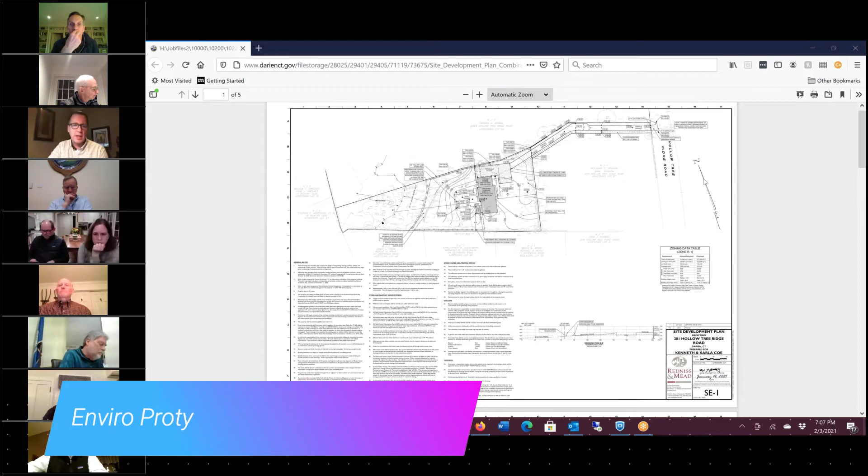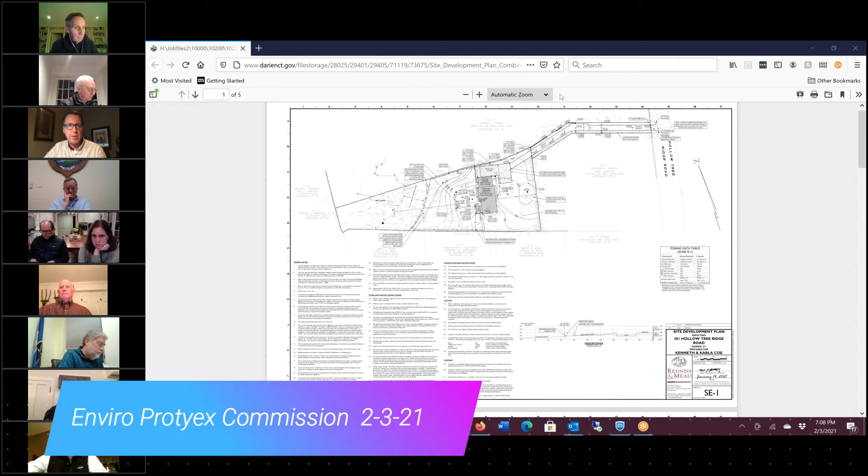The amount of disturbance within the 50-foot upland review area is very limited. It's just a single trench with two twin 6-inch pipes discharging to the edge of the wetland, and we brought it to where we have there really just to avoid having to pump any footing drain discharge. It gets everything nicely and cleanly by gravity down to the wetland area. It's about a slightly more than 50-foot run with a limited width trench.

We are demarcating the upland review area both with boulders as well as conveniently with a pool fence. So it will really cordon off the wetland area and prevent intrusion once it is developed. The house is set east enough so that there's plenty of room between the new house and the upland review area, so as not to need any temporary disturbance in the regulated area.

We have spoken with staff. They've had a couple of small comments. There's some accumulated landscape debris within the wetland area, within the regulated area, that has been accumulated over time by prior owners, which obviously as part of this we're happy to have removed. And there was a question about some of the stabilization. We do have a planting plan on record with the application prepared by Environmental Land Solutions that does spell out, and I think there was an email earlier, Rich, from Craig, just pointing out that particular.

Yes, I found it was a note about the seed mix, and I had missed it, so I found that. Okay, figured that out.

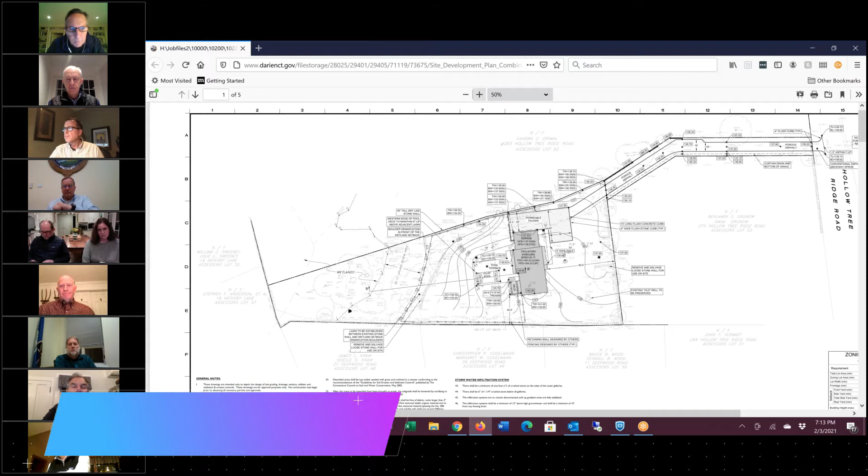It took me a while, like you described yourself, Eric, where it was a little hard to find. It took me a while. I was out there today. I did not walk all the way back to the back of the property, but I do see the wooden stakes right adjacent to the home at 283 Hollow Tree Ridge Road. So it's clear to me as I look at it where the proposed site is. I agree with Bill that it's quite a nice, very private little spot tucked in here in the woods of Darien. I think it's great, but I did have a couple of simple questions.

One more for correcting proper submissions by the consultants. But the first question, which maybe has a little more content to it: there's a letter in your package from ECM Associates addressed to Mrs. Drimmel at 283 Hollow Tree Ridge Road, dated back in July of '17. Could you give us a little background as to the 3.5-year difference in timing on that letter and in tonight's conversation?

It's going to take me a moment to just bring that up. I was originally thinking, was this a subdivision of the Drimmel property? But I think it's pretty clear that's not the case, but I could use your help. All right.

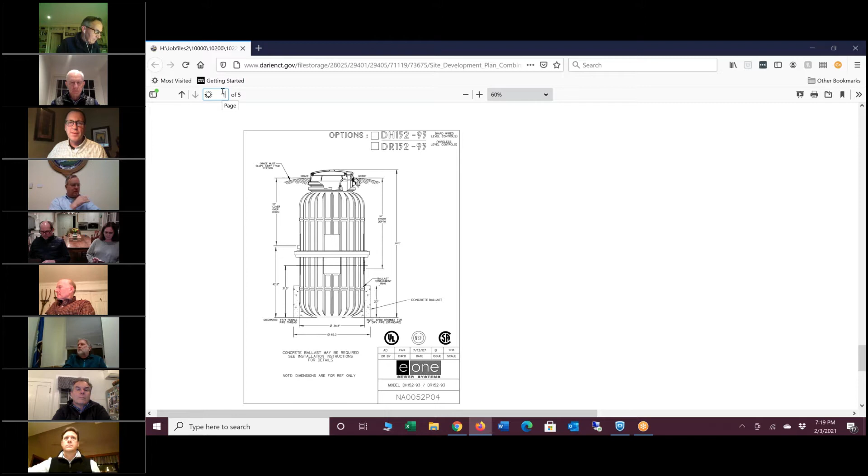We'll be sure to do so. Thank you. Okay, hey Brian, if Jim's figured it out, I'm not surprised, because he's brighter than I am. But from what I get, there was a house there -- it's a replacement. It was taken down in 2015.

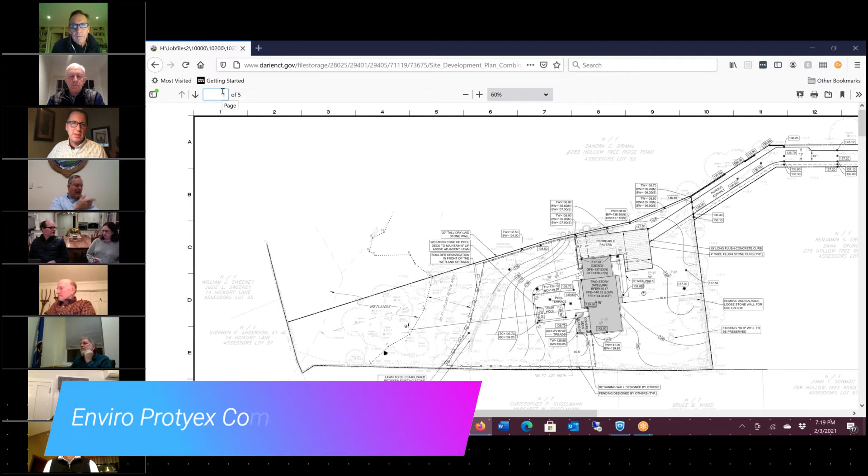So was the property at 283 part of this property? Was it, Rich, is it clear to you? It seems as if they marked both properties. I don't see that -- maybe I'm reading it differently, but the drainage summary report, I don't see where it references this. This one is very clear for the property north, and the property north is probably not that much different than this property, given the general terrain.

I looked at the wetland delineation, which went all the way to the south, and that's the delineation you're using. What I think we should do then is have this clarified. I want to have a clean record, because if someone were to review this, and he's not as smart as Jim, he's not going to be able to figure it out like me.

So what I'd like is, and Brian, you have to help with this and tell Craig -- he got me, okay -- this should be clarified. I don't think it's going to stop the application, because I'm sure you want this in order to get to P and Z, to start digging in the spring. So I can still write it up, and in the meantime figure it out and clarify that before the next meeting.

That works, would that be okay, Jim? Yes, Rich's suggestion there works for me. We have a month before we have to review that and sign off, if we all agree. So Brian, I give you a little homework. Will do -- I think it was just combined in the original thing all the way down to the wall that runs along the south border of our site, but I'll certainly have that clarified for you and send it into Rich. Appreciate it, Brian. Okay, so Gunnar, do you have anything?

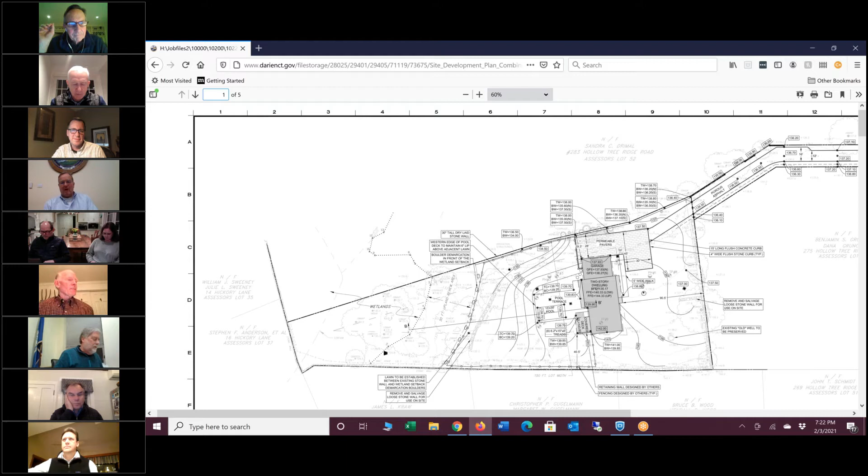Okay, what we can do, Gunnar, since I'm in your situation, is we'll write this up as if to be approved. However, Brian has some homework on his part to go and clarify whatever this is, and then you and I can go out there once the snow disappears, and walk it before we give the approval, before we receive the draft for approval. If we have any questions, we can get them to Rich, or call me and I'll go out, and Rich can go out with us to walk the property. Is that okay, Rich, Gunnar? That's fine with me. Sure, that's a great suggestion. Thank you, Eric.

Okay, I know people are anxious to get shovels into the soil, so is there anybody else who has anything they'd like to say? No. Okay, good, then we'll move on to the next piece of business.

The next piece of business is EPC 02/2021. Marina Christofi, 7 Buttonwood Lane, proposing pool construction in an upland review area. Site is shown on Assessor's Map number 5 as lot number 7.

Gunnar, I hope you didn't have trouble finding this lot. No, I found this one, no problem. Well, considering it was on the corner of 2 streets, it was one of my... it was a little confusing, but I found it.

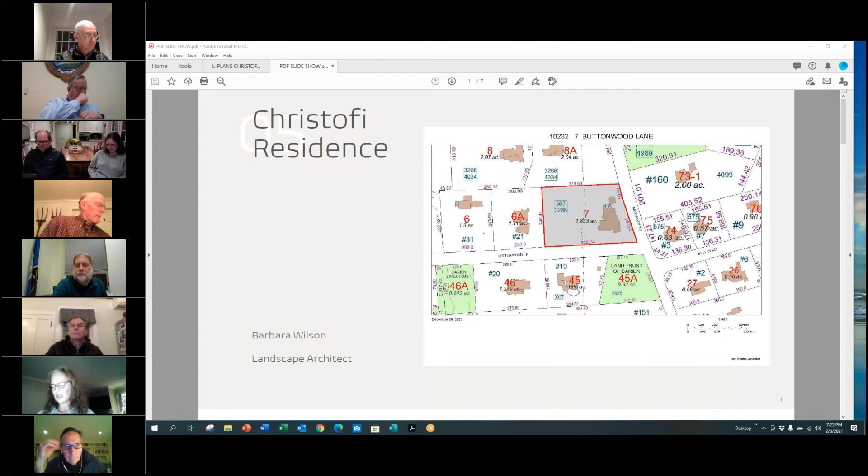Okay, great. So this property is at 7 Buttonwood Lane. They're looking to improve the upland entertainment area at the rear of their house to accommodate the needs of their small children. Right now they have a very small spa, a little patio encircled with a pool fence, and this just does not work for this family with their kids, especially during COVID, where they want to learn how to swim. So what we're proposing on this 1.853 acre lot, which has about a half acre of wetlands - here's the house, the wetlands start about here, and this whole part here is wetlands.

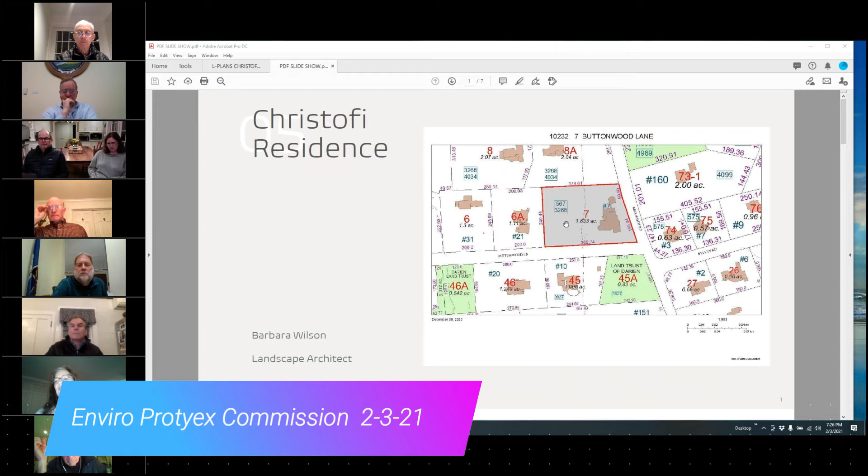So I've got some pictures of the existing wetlands. This is standing at the street, looking at the small stream that dissects the property from north to south. This is a little further up on the stream. There are significant wetland plantings that were put in, I think when the house was first built, and then during some renovations. All of this material up both sides of the stream is extant and was planted historically. You'll see there's a line of boulders demarcating the edge of the wetland line, and some nice shrubs - wetland plantings that are significant in there.

So this is the area at the back edge of the property where we are proposing to put a rain garden. You can see there's a lot of moss and grass bed, under some red maple trees.

So this is the area we were going to talk about putting in a rain garden, just for clarification on the existing conditions for those who haven't been there. This is the side of the house. We're looking to upgrade this existing patio and renovate parts of it. This is the existing spa area enclosed in this little fence.

This whole thing is going to go away. The existing patio with the pergola is staying. Under the pergola, this patio is all gravel—you can't walk on it in shoes, kids can't run on it barefoot—so we're proposing to put in pavers.

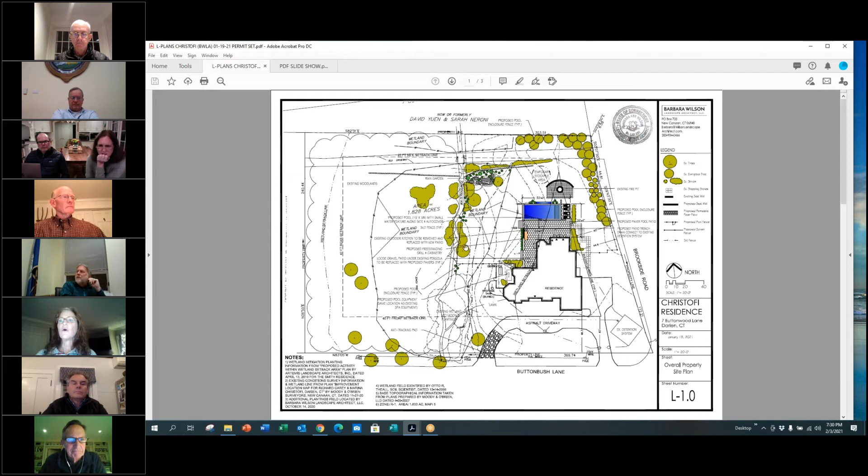This is an enlargement of the area. Here's where the old kitchen was. We're taking that all out and making a new patio, basically just this spot, and then doing a free-form outdoor kitchen that sits on the patio. Here's the stairs down. The pool itself—the water will slope away from the house.

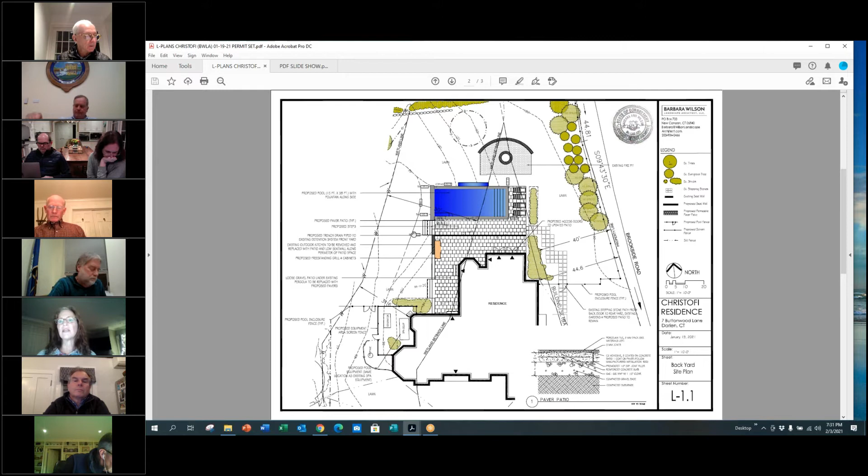There'll be a trench drain here that connects to an existing infiltrator system in the corner of the house that was already implemented. This area will be at grade—we're not doing any grading back here. There'll be an exposed wall from about here to here, which will be veneered. So no grading in the backyard at all, no grading around the new patio. The only thing that will probably need a little grading is adding these stairs to access the yard.

This is the proposed plantings, the mitigation plantings we're proposing. We'll put in some ornamental plantings that are native, a combination along the existing patio and along the outer edge of the pool, which will have a small water feature. Then we'll try to fill some gaps along the stream with native shrubs that will handle the conditions here, here, and here.

This is where we're proposing a rain garden, which will be all shade material because there are two existing red maples here. All of these light green plantings are existing—most were the wetland mitigation plantings that were planted, and they go all the way this way.

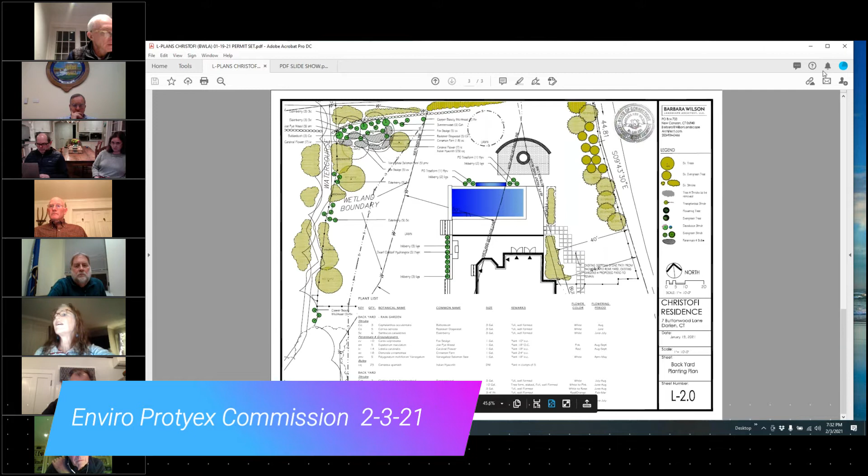So that's basically it. We are proposing to remove something. The pool, I forgot to say, the existing spa and fountain are both leaking, so they have to be repaired anyway. So that's it in my summary.

I have a question. The pavers, are they pervious? Are you going to have pervious material between the pavers, or is it going to have sheet flow off the pavers? We were proposing right now to do granite on concrete, which is what the detail on the plans shows. So that is what we're proposing at this time, so that the water all goes to the drain system that is between the new pool and the existing house.

Okay, and then the drain goes to the rain garden? No, the drain right now goes to infiltrators in the front of the house. We potentially could have it go to the rain garden, but right now the owner says there's a lot of water that pools in that area. So we were trying to address the water that's running all the way from the fire pit in the backyard, which was graded to put in the spa and the fire pit. It is actually damaging that area and scouring it.

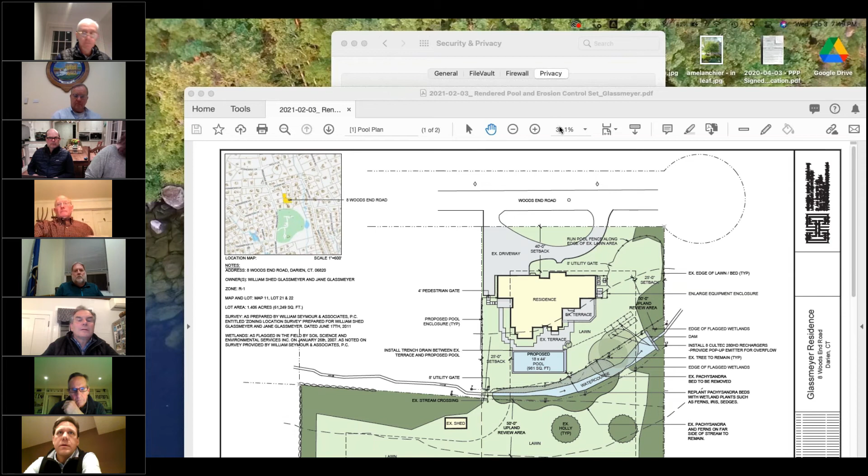There you go. Oh, what happened? I don't know what happened. You got it. Well, hey Fred, I think you're up. All right, let's see. Sorry for this, just maximize that PDF window. There we go. You're good, better?

Okay, so this is the property, 8 Woods End Road. The residence is located on the eastern half of the property. The property is bisected north-south by an existing watercourse, so about one-third of the property is to the east of the watercourse, two-thirds to the west. The existing driveway loop is off Woods End Road with a small parking area.

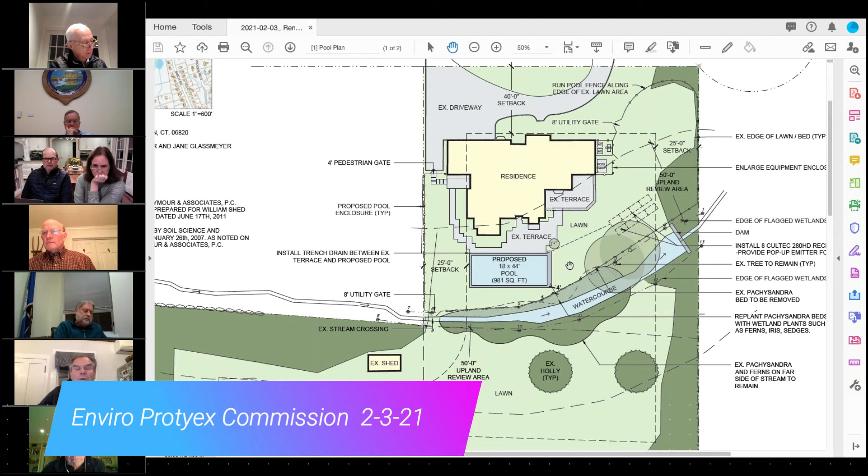There's an existing terrace along the back of the house. Along the watercourse there are two small strips of wetland identified by this dashed line. These two areas are beds of existing pachysandra, pretty thickly planted, although on the west side there's quite a bit of ferns mixed in with the pachysandra. So the proposal before you tonight is to construct a new pool, 18 by 44, approximately 981 square feet total.

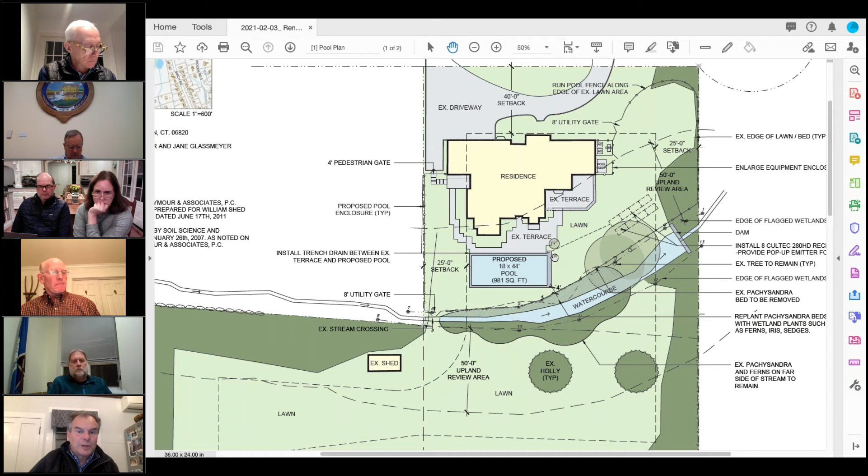It's to be constructed immediately adjacent to the existing terrace behind the house. There's no new patio or terrace being proposed. The existing terrace is bluestone set on a flexible bed, so it has tight but open joints, not a concrete slab. The existing terrace drains to the west towards the watercourse.

So when we install the pool, we're proposing a trench drain along the edge of the pool to intercept any stormwater runoff. That, along with the water from the auto cover trough, will be piped over to an infiltrator gallery system in this area, which has been designed to accommodate the 50-year storm.

We are going to enclose the pool with a fence. The fence will come off the side of the house on the north side, follow the property line, go inside the wetland line to the south property line, and loop back to tie off to the southern corner of the house. We're also proposing to remove all the pachysandra along the stream bed and replace it with a mixture of native perennials, sedges, and grasses to create more of a native buffer along the watercourse.

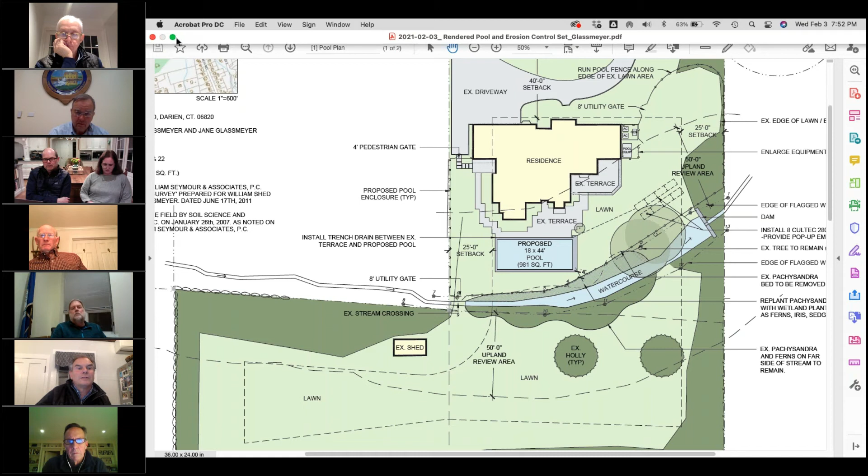The area where the pool is located is in a pretty flat lawn area, and I'd like to show you some pictures in case people hadn't gotten there. Let's see if I can get that up.

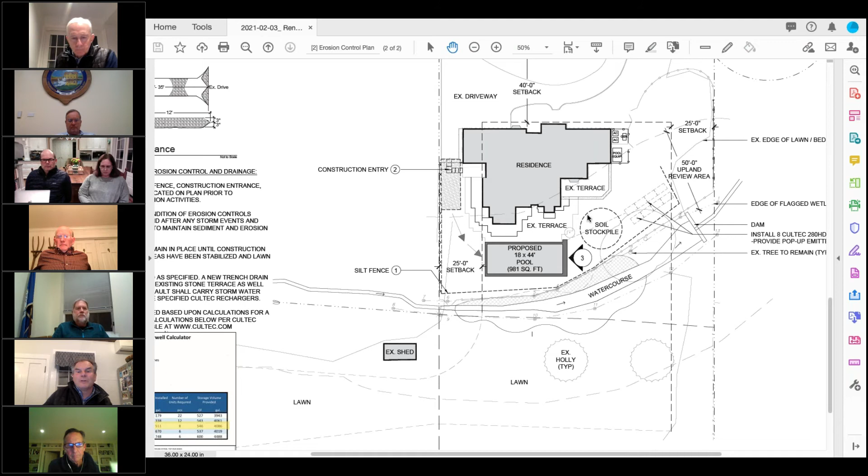We've prepared a soil erosion and sedimentation control plan. We intend to access the backyard over the existing driveway with a construction entry and gravel pad. We're going to enclose the whole eastern rear yard of the house with a row of silt fence and hay bales. Whatever topsoil we strip, we're going to stockpile in this location.

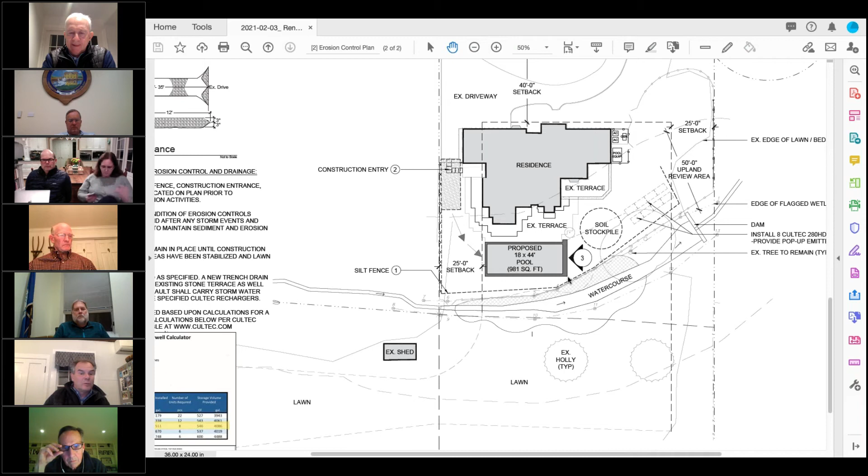The southwest corner of the pool is really the closest to the adjacent wetland area. We believe that because it's so flat, we have maybe at most a foot of grade change between the proposed corner of the pool and the existing grass. So we intend to grade off that spot at a 3-to-1 slope so that we're not going into the wetland. There's a section which delineates that as well.

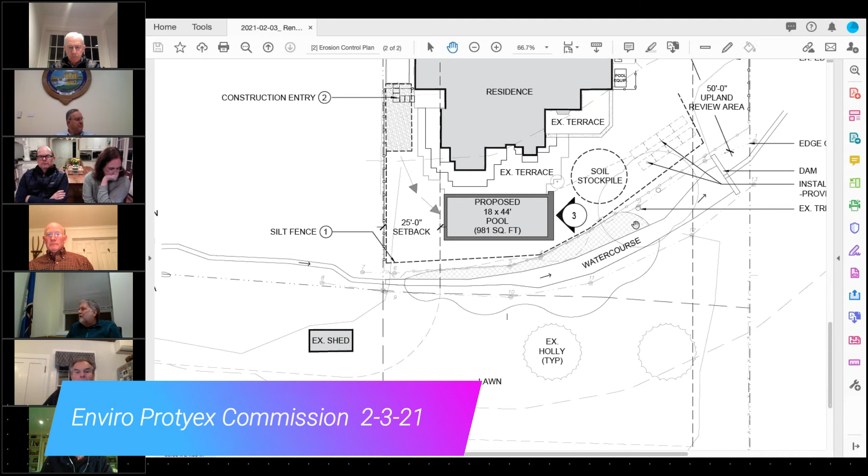I believe it's a pretty straightforward proposal. It's really just the pool and the fence. The fence will act as something of a barrier to the watercourse, and the new plantings will be an improvement over the existing invasive Pachysandra.

I did receive a call, spoke to Rich Jacobson earlier today, and he suggested that maybe this Pachysandra bed on the other side of the watercourse could be replanted in a similar manner as we're proposing on the eastern side. So we're willing to do that.

So if there are any questions? Okay.

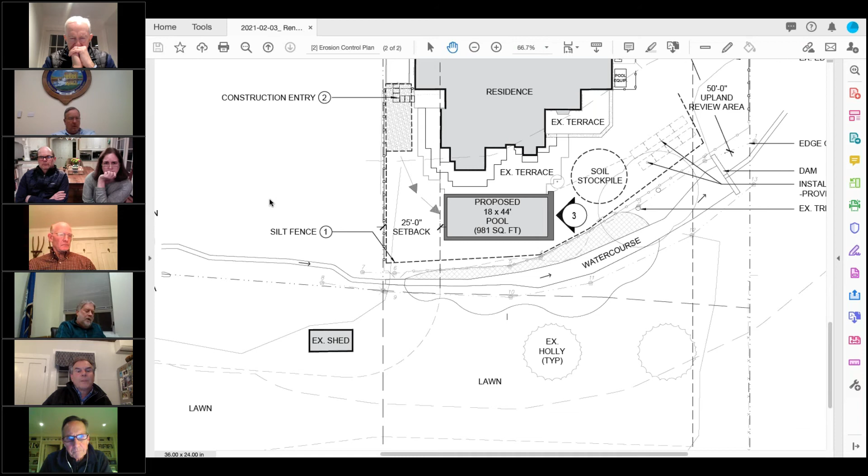Rich and I were just talking here about ferns. There's some nice ferns in different parts of the Pachysandra, which they can easily work around.

So that would be, well, you typically want to see a list before construction fleshed out. We can leave that to staff approval, a planting plan subject to staff approval. The ferns can easily be worked around. Mr. Eckerson would say any approval would be contingent upon looking at the planting plan and coming to agreement with staff as to what the planting plan would be.

Okay, going down, hey listen, just to change things up, I'm gonna go. Mr. Wright, you want to go first?

Pachysandra, so I need to learn something about this. Pachysandra on a stream bed, I know it's invasive, but it seems to be very good at holding erosion back, and probably also good about, back to my fertilizer issue, catching any runoff from fertilizer. So if you replace Pachysandra because it's not as nice looking and it's invasive, can you still capture that same erosion control and the ability to stop fertilizers from getting into that watercourse?